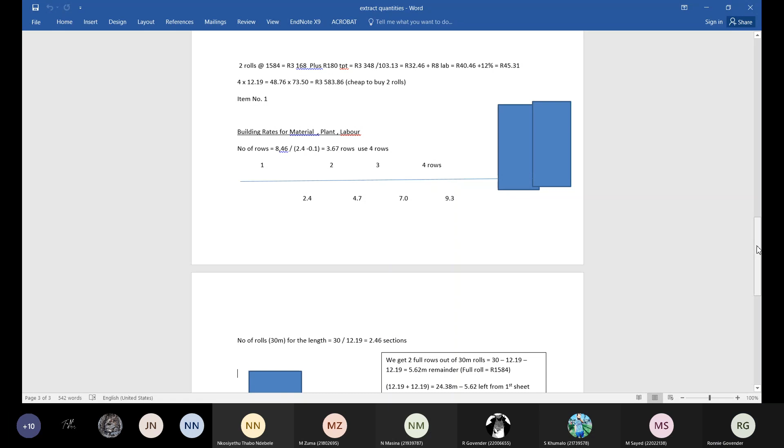Right. Then let's rather just put it quickly while we're at it here. So 45 rand 31. The way I would have put it is 45 rand 31. 45.31. That is the rate including my markup and everything else. And you'll notice, if I want to extend that quickly.

So I said 45.31 times 103.13. 45.31 times 103.13. It'll give me 4,672 rand and 82 cents. 4,672.82. Right, that's the full amount of laying that BRC mesh.

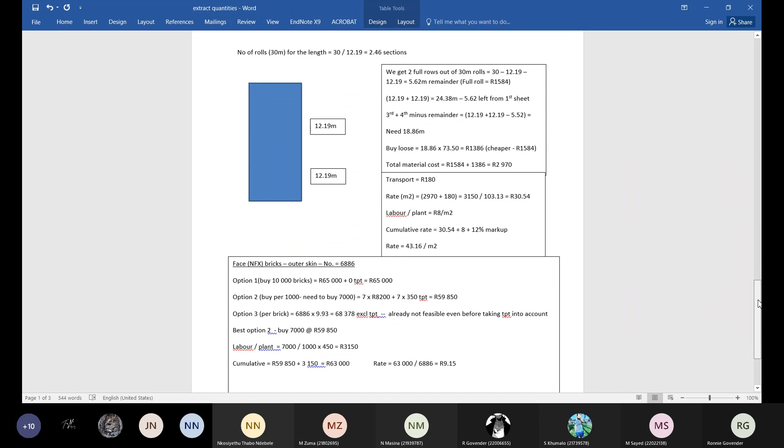Right, I'm going to look at what they tell us about the next item. Right, that was the first one there that we did. Let's look at the next one now. The next one is, okay. I'm going to look very quickly for the next item.

Right. Item number 2, they talk about the face bricks, NFX bricks, face brick. The cost of the face bricks is for every 10,000, you'll pay 65,000 rand. If you buy a bulk load of 10,000, you're going to pay 65,000 rand. If you buy every 1,000, you're going to pay 8,200 rand. And if you buy each one, you're going to pay 9.93 rand for a unit, one brick.

Transport, if you buy 10,000, is free. If you buy 1,000, it's going to be 350 rand, and less than 1,000 you need to pick up. And you have to include your transport cost there. Labor and plant is 450 rand to lay every 1,000 bricks. That's how much it's going to cost us, 450 rand to lay 1,000 bricks. Right, so just remembering that now. I know it's going to be a little bit hard, but I'll remember the values.

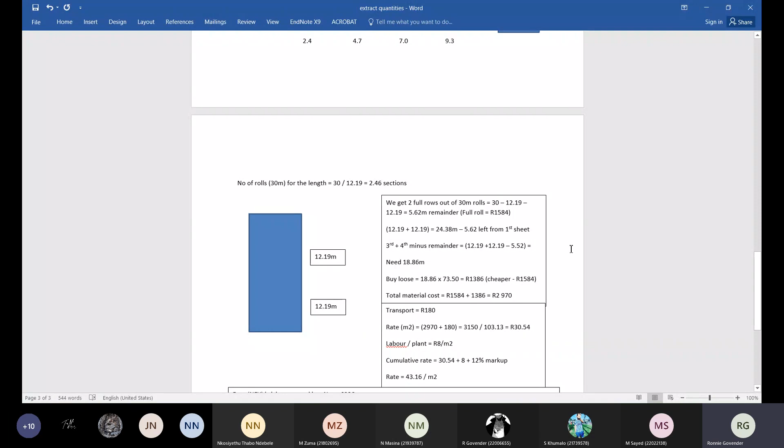Oh, sorry. There was another option there. Sorry, class. Let me just go through the second part of this calculation for that 30 rolls, remainder of a full roll. Okay, sorry. There were two options on the previous one. I may have gone and put the wrong rate there. Just 1 second. I think we can get a cheaper rate because you got to work through it. Sorry, my apologies. I'm only seeing that now. Right. The other option was to.

Oh no, sorry. This is if you built wastage into your rate, then you could have gone for the second option. But the first option is obviously the right one. But normally what happens, you allow 15% wastage, right? You have to allow at least 15% wastage. And if you're allowing that 15% wastage, you'll notice that you could have saved that 5.62 meters that's left from each. You know, when you put 12.19, you could have saved that, but I don't want to confuse you. Leave that, because unless we specifically ask you to include wastage into your rate, because we don't normally ask you to do that, because that's based on your markup and so on.

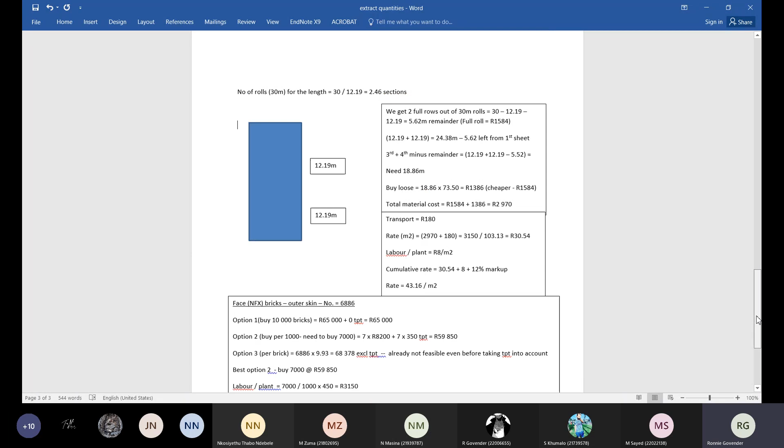Right. Looking at the NFX bricks, we got option number 1 is to buy 10,000 bricks. We said at 65,000, transport is free. Option 2 is to buy 1,000, and we're going to pay 8,200 for every 1,000 bricks that you buy. So in total, we got 6,000. Was it 6,886? No, it was 6,559. Am I right? Anyone can reiterate the quantity that we had there? Okay, let me just go up. I think it was 6,5. What would I get? 6,559. Yeah, it was 6,559. How did I get 6,886? Sorry, it's going to change slightly. I'm going to have to change the 6,559.

Right. So the option is basically to buy. I don't think it's going to make much difference down here. Right. If you buy 10,000, we're going to pay 65,000 Rand, because we need 6,559 plus wastage and all that 15%. You'll notice it. You're going to add another about 1,000 to that. So 7,500 you're going to need roughly. Right. But if I'm buying 1,000, I need to buy 7,000, right? Because remember, I'm not including my wastage in this as yet. So that's going to give me 7,000. It's going to be 8,200 per 1,000. So it's 7 times 8,200. Plus, remember the transport is 350 Rand for every 1,000. So it's going to be plus 7 times 350 Rand. So that comes to 59,850 if I buy 7,000.

Then option 3 is to buy each brick. In other words, okay, this value is wrong. Now I'm going to have to change that value, 6,559. 6,559 times 9.93. Let me just recalculate that. It gives me 65,130. That value there was slightly wrong. 65,130, but that's excluding transport, and you can see it's already not feasible because even before taking the transport into account, the amount is still more than the other two. So option 3 straight away out of the count.

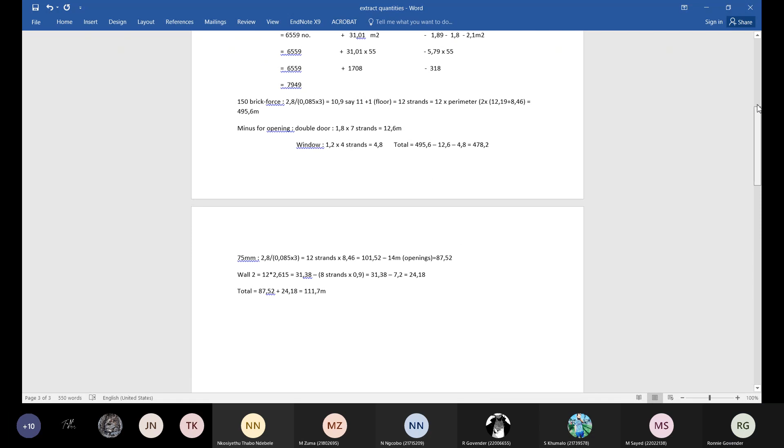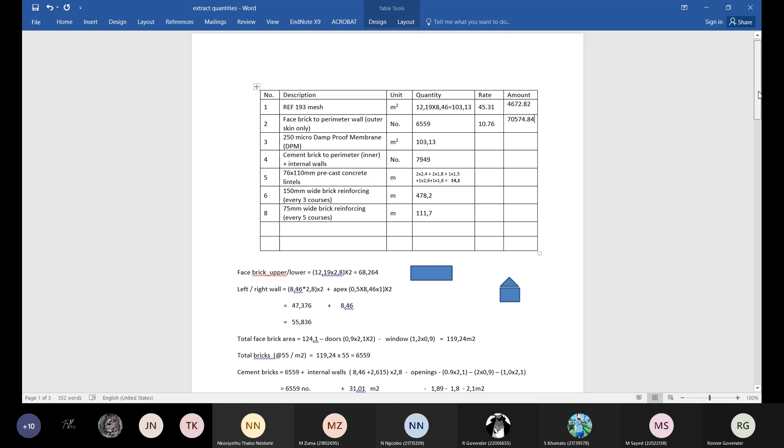So my NFX bricks will be 10 Rand 76, and 10.76 times 6559, which gives us roughly 70,574 Rand and 84 cents. 70,574.84. Right. That's basically the second one.

Right. The third one, let's see if I can have some feedback, because you're going to work through the rest of them. But first of all, the third one is your 250 DPM, the damp-proof membrane that goes underneath your mesh. We know that the area is 103.13, but if you look at the story, very quickly, I'm going to bring up the story on what they told us about that DPM.

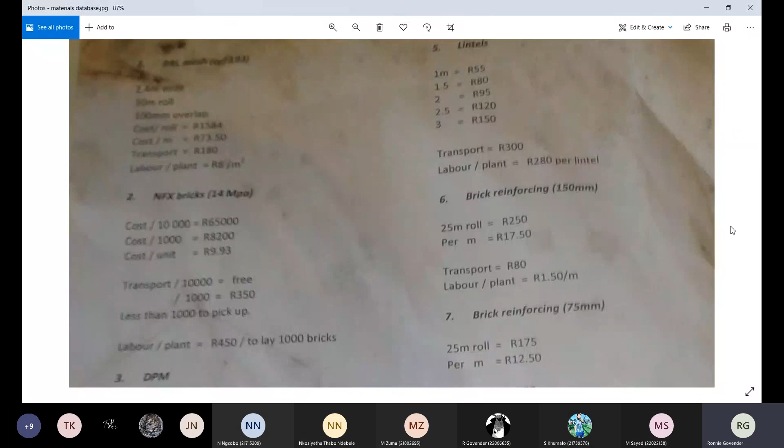Right, looking here, I'm going to go down a little bit. They tell you that it's 1.2 meters wide. Sorry, not the mesh, the plastic, my apologies, the DPM, damp-proof membrane plastic. It comes in a 1.2 meter wide roll. The roll is 60 meters. You need 150 millimeter overlap. And the cost of a roll is 374 Rand. The cost per meter is 7 Rand 24. And to transport is 180 Rand. And your labor cost is going to be 5 Rand 30 labor and plant per square meter.

Quickly, before I get you to attempt the rest of them, anybody? How many rolls are we going to need roughly? It's 1.2 meters wide. It's 150 overlap that you need. So how many rolls would you need? Class, can you hear me? Anyone? I said it comes 1.2 meters wide. You need a 150 overlap. How many rolls are we going to need?

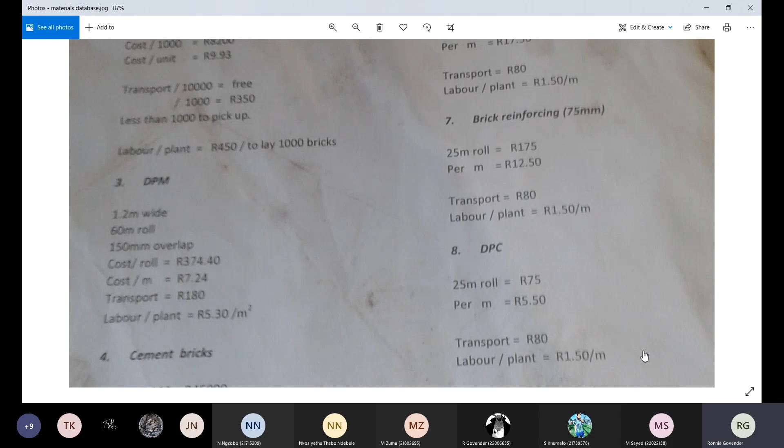Anyone? It's going to be 8.46 divided by 1.2 minus 0.15, which is divided by 1.05. So roughly you should need about 8 rolls. Isn't that so? If you look at it, the first one will go to 1.2 meters. The second one will go to 2.3, then 3.4, 4.5, 5.6, 6.7, 7.8, and then the last one will go to 8.9, and we need 8.46. So you're going to need 8 rolls.

Now, you know that you're going to need 8 rolls. It's 60 meters a roll. You should get about 4 rolls from a roll because it's 12 meters, 12.19. If it was exactly 12, you would have got 5. But we allowed that for the wastage. So you'll get 4 rolls from a roll, and you need 8 rolls. So you're going to need 2 rolls.

You work out what's the cost for 2 rolls at 374.40, or you can also work out what happens if you use the balance at 7.24 per meter, which obviously will come a lot more. And then you can work out the transport, 180 Rand, and then add your labor, 5.30, and your markup. Class, any questions regarding this?

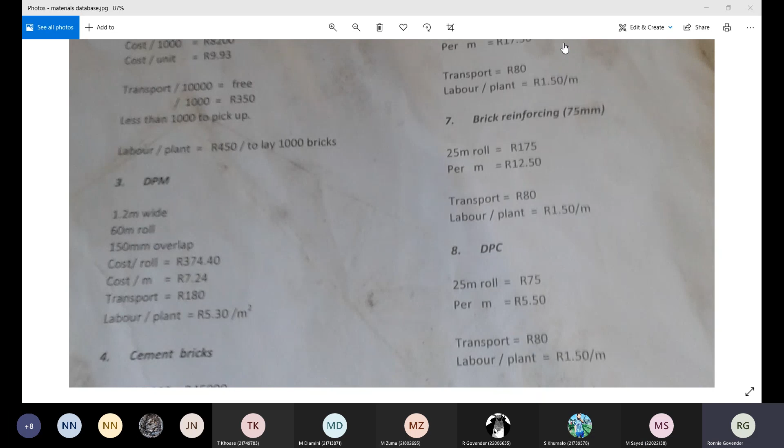Any other questions, class? So can you show me how you get the 111.7 for the brick reinforcement? The 5 courses one. I still can't get it. Okay. Send me your working, and I'll show you. You can email it to me. Okay, quickly, let me just go through it and I'll show you basically what to see for the rest of them. Normally I won't do it, but let me bring that up. As I said, with tutorials students want to just sit back, but I will.

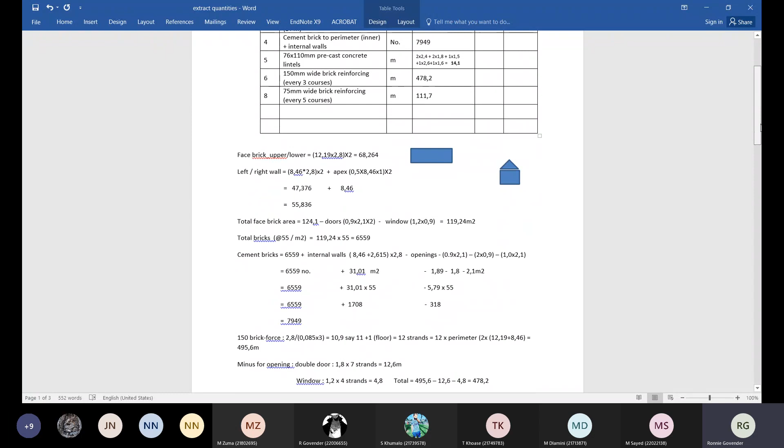Right. So I said 112, it's actually 111.7. Can you see the calculation there for the 75 millimeter? That's the internal walls. Now, to work out how many strands I need, it's every five courses. So it's 2.8 meters divided by each course, 0.085 meters. The brick is actually 75 millimeters high, plus your mortar comes to 85 millimeters. So each course is 85 millimeters high.

I may have slipped up slightly, but let's see, because it said the internal was at every 5 courses. It shouldn't make much difference. So it's 2.8 meters high, that's your ceiling height, divided by 85 millimeters per course, times 5, because every 5 courses you put a strand. 2.8 divided by 0.085 times 5 equals about 7, so 7 strands I'm going to have, and not 12 there. Okay, it makes a slight difference because I worked on every 3.